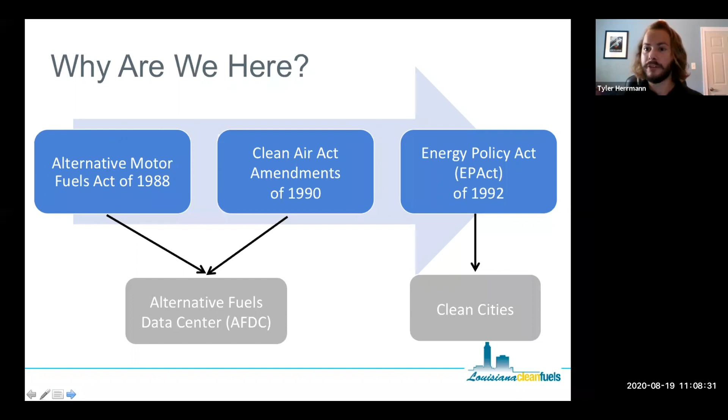We have two major goals: reducing emissions from on-road vehicles, as well as reducing petroleum imports. We do that by promoting and providing technical assistance on alternative fuel vehicles. There are around 100 coalitions across the country, each led by a coordinator, such as Ann or myself, with kind of separate territories. We all get to deal with things specific to our region, because every state and every region has different needs and different technologies that work for them.

So that allows for a very individualized approach for the given territory. But there's a lot of crossover between us, so we all work together very well, and that gives us a wonderful national network of coalitions that can feed on each other's expertise and knowledge, while still being narrowly specified to our region. You can go to the next slide, Ann.

So the priorities of Clean Cities coalitions under the Department of Energy are national security, so that's being fuel independent and energy independent. Affordability for business and customers: a lot of the alternative fuels end up being cheaper for customers, and a lot of the technology improvements we work on make it cheaper for individuals and fleets to operate their vehicles. Economic growth kind of comes with the territory, since alternative fuels are domestic fuels, and that helps everybody whenever we invest in them.

And then reliability and resiliency. A lot of that just comes from doing it and getting case studies and learning more about the fuels and what they can and can't do. All that can feed into making a more reliable and more resilient network of fuels. Having more fuels than just relying on a single one or two also allows us to have redundancy. So you can go to the next slide, please.

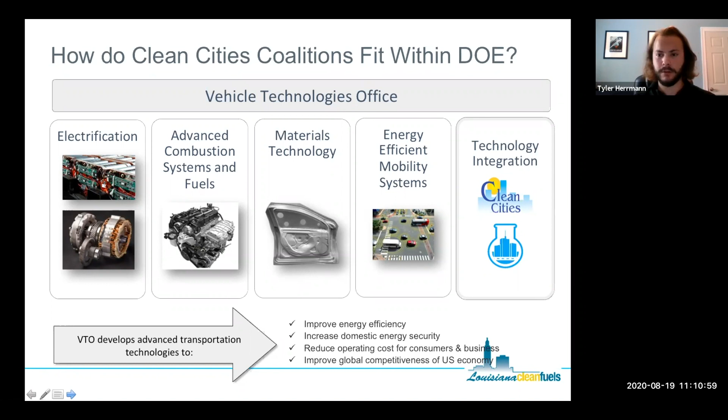So how do we fit within the DOE? The Department of Energy has under it the Vehicle Technologies Office, which has 5 different segments: electrification, advanced combustion and systems and fuels, materials technology, energy efficient mobility systems, and technology integration. Clean Cities fits under technology integration. So we're a DOE program focused on technology integration, actually getting these vehicles on the road and into consumers' hands.

We deal with everything: light, medium, heavy duty vehicles across the market. Energy efficient mobility systems technologies focuses on how these things fit together in one network to make an actually good, robust marketplace and technology suite we can all benefit from. And we work with all the alternative fuels as well, not just natural gas or electric. We work on all 6 that you see laid out there.

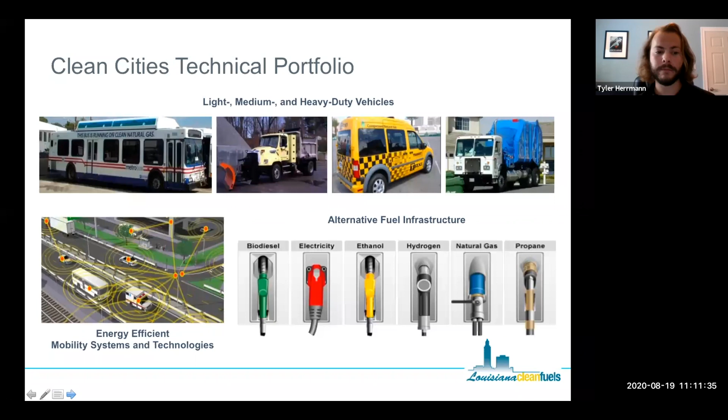I always like to focus on this one a bit. We don't specifically deal with greenhouse gas emissions all the time, but it's important to look at. Back in 2017, transportation overtook electricity generation as the largest greenhouse gas source in the country. That's a huge deal, because since the dawn of electricity generation, that's been the biggest greenhouse gas emitter. Transportation has been steadily increasing, partly from increased transportation but also because electricity generation is becoming more efficient. This gives Clean Cities a good vantage point, since we're experts on transportation, so the ball is in our court now. In 2018 alone, Clean Cities reduced petroleum usage in America by 1.1 billion gallons, which is a huge number with associated greenhouse gas benefits as well.

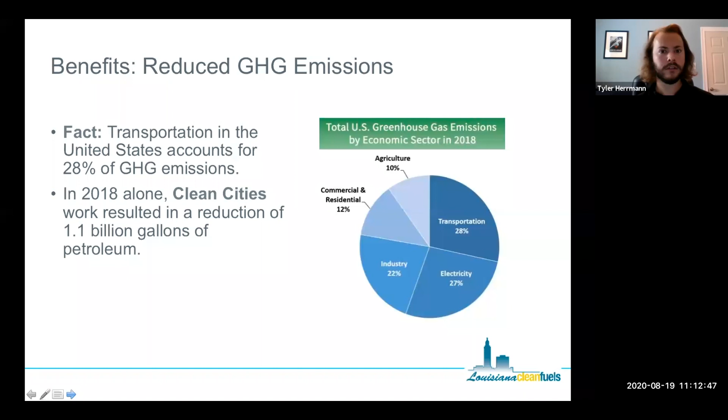A couple of our programs: we have a green fleet certification, launched a couple of years ago, to recognize fleets doing particularly well with reducing emissions and focusing on alternative fuels, which is awesome. We also give feedback to fleets, telling them, for example, this particular VIN number truck could be replaced by this sort of vehicle, or suggesting ways to shift things around. So we give actual direct feedback, which is lovely.

Outreach and education is the bread and butter of Clean Cities. We host webinars, workshops, conferences, and try to get information out there, because information isn't valuable unless people actually have it. First responder training and funding assistance are other things we work on - helping facilitate grants or making good grant applications, and training first responders so they understand how to deal with alternative fuels if there's a fire or other problem with a vehicle.

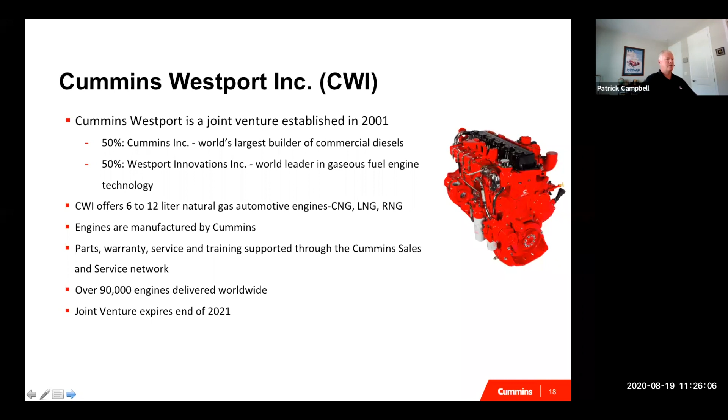So this is the product lineup. Like I said, we do 6 liter to 12 liters. So we have a B6.7N, an L9N, and an ISX12N. For those who have been around a while and have known our products, we've made some nomenclature changes a couple years ago. We used to have the G as the suffix at the end of the name. We've gotten rid of that because we have a corporate branding culture, and the N designates natural gas, and the G could in the future designate gasoline. So we decided to make that change.

Product range from B6.7N, 200 to 240 horsepower, all the way up to the 12 liter, 320 to 400 horsepower. You can see the torque ranges, etc. These are all near zero engines. There's a typo in the B6.7N as a 0.1 - these are all 0.02 gram engines. The EPA certification level is 0.2, so we're about 90% cleaner than our diesel counterparts. That's a big deal, especially in California or anywhere there are sustainability goals and alternate fuel type funding and so forth.

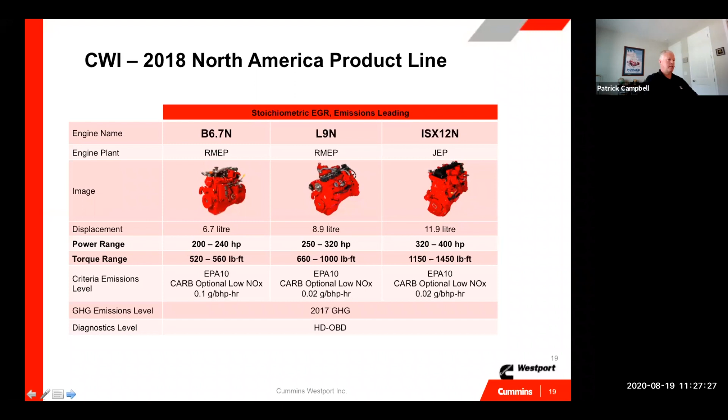Some of the applications we work in: on the top row from left to right, that's a Freightliner tractor, a transit bus next to it, a low cab forward garbage truck, and of course a school bus. On the next row, we have some of our major customers. UPS has about 5,000 Cummins Westport products. Waste Management has in the neighborhood of 12,000 and growing. Both of those fleets are still continuing to buy CWI.

Then we have a bulk hauler - we do pretty well with bulk haulers. And then you have a turnpike double from FedEx. Lots of applications - basically anything that goes from point to point and has an opportunity to refill overnight is right in our wheelhouse.

Finally in the bottom row, you have a terminal tractor or a yard jockey. We do pretty well there, as well as that concrete mixer. The point to make about that is we have fleets that are awarded government contracts for road building, etc., that are able to use a sustainability provision to get contracts. There's a big fleet in Chicago, Ozinga, and CEMEX is looking at some concrete mixers for California. So it's a growing part of our business.

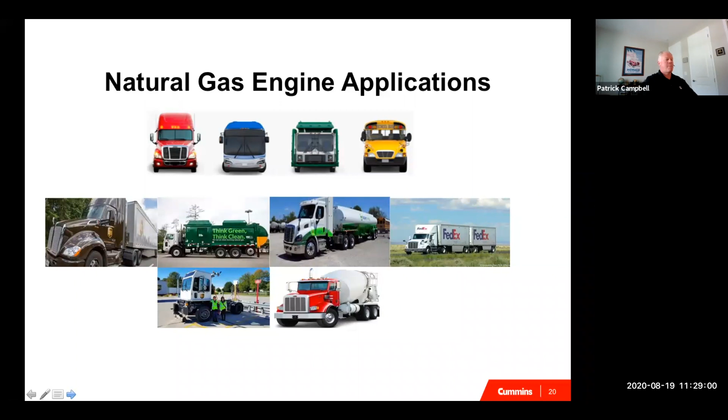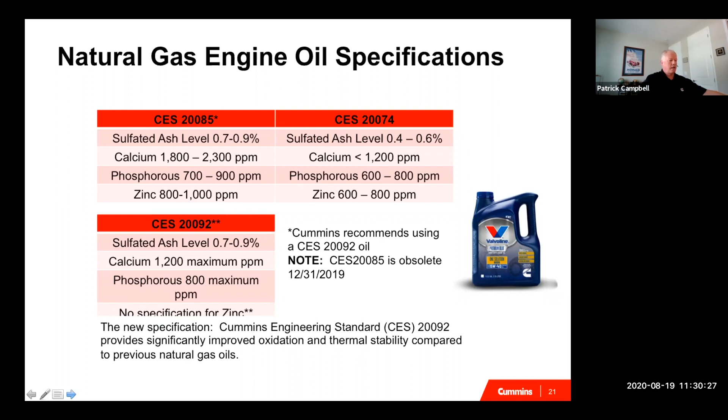Oil level checks probably seem very self-explanatory, but you wouldn't believe how many times we have to do an investigation on why units seem to be using oil. A lot of times it's based on drivers putting too much oil in. They'll pull in, fuel up, and check the oil right away, and it doesn't give enough time for the oil to drain back into the oil pan. We recommend a minimum of 15 minutes, but you're better off waiting 20 to 30 minutes to check the oil. Make sure the dipstick's inserted the whole way.

We can't emphasize this enough: never fill or add oil if it's anywhere between the full and add mark. Only add oil if it's below that, in the add section. We've had a lot of oil consumption issues where the engine will burn the oil off, and fleets become quite upset because they think we have an oil consumption issue. In reality, it's just that they're adding too much oil to the engine.

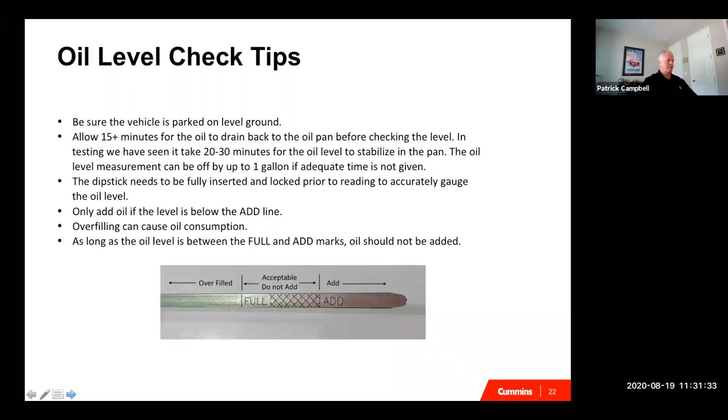So, oil consumption. One of the big reasons we have it is obviously overfilling your crankcase. But another reason is because oil drain intervals sometimes are missed. I'll get into the specifics, but it's a big deal for us because these engines are very sensitive to oil drain intervals.

We went to 1,000 hours or 50,000 miles, for instance, on the 12 liter. But you have to think about the average speed of the engine or the truck. If you're an over-the-road truck averaging 50 miles an hour, times 1,000, you're at 50,000. However, if your average speed is 18 miles an hour, like for a refuse truck or a bus, then your drain interval is around 18,000. So there's quite a bit of difference. If you go over, these engines are very susceptible to issues with precious metals inside the engine wearing out prematurely, oil leaks, etc. So we just wanted to reiterate, make sure you're changing your oil on time.

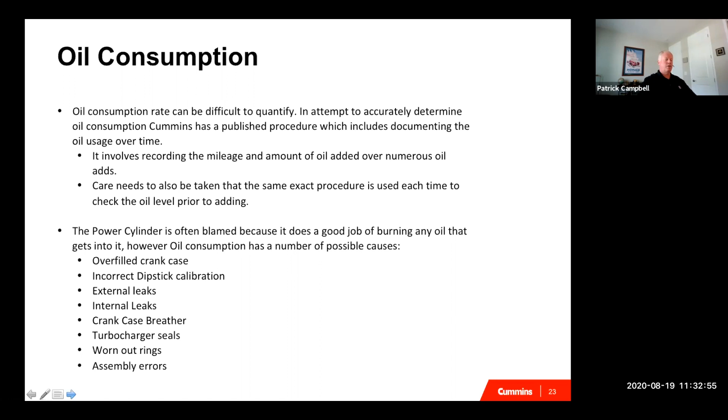It's a conversation that we have with fleets all the time, so I just wanted to make sure that was very clear.

This is a quick chart of the different components of the engine on the left-hand side, and then the hours and part numbers for the maintenance. You can see spark plugs for the B6.7 are 750 hours, 1,500 for the L9, and 1,000 hours for the 12 liter. People ask why it's less for the 6.7 — the quick reason is the engine runs at a faster RPM, so it gets more sparks, so it needs to be replaced more frequently.

Anyway, that's there, and I'm sure this will be in the follow-up material. If anybody has any questions and wants to reach out to me, we can discuss that offline about their maintenance and so forth.

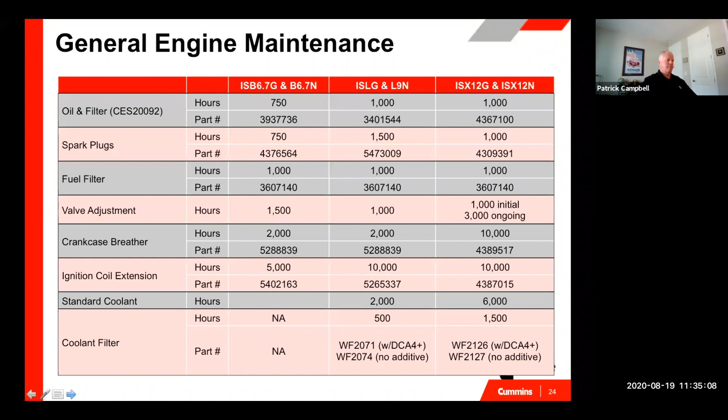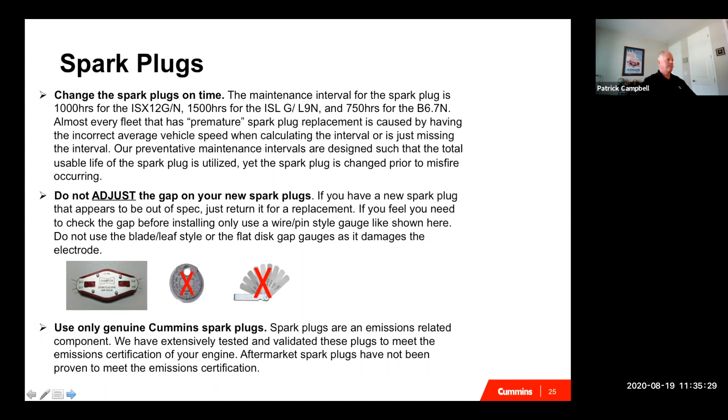I think that's it on that. Next slide. Oh, that's just a copy. So the spark plug—another thing about maintenance, please do your maintenance based on hours. I reiterate, the way to calculate it: if you have INSITE software, which is the Cummins diagnostic program that you plug into the engine to get all your fault codes or fuel economy numbers, it'll tell you your average vehicle speed, and that should be a way to back into the number on your maintenance intervals. Spark plug and oil changes should be performed on time, not waiting until you're having fault codes, because you'll have unplanned downtime.

Idle time is very negative. That's why we recommend hours versus miles. These engines really don't like to idle much, and it degrades the oil even quicker. So we recommend keeping idle time to a minimum.

Genuine Cummins parts—we recommend always going with the genuine channel. The CES 20092, the 20085 is probably not even available in the marketplace anymore, but we just want to make sure you're using the right oil.

Finally, every other maintenance interval, you should probably make sure you have the latest ECM calibration. Cummins is always making updates and changes, and that information is available online with the INSITE software. So make sure you have the latest and greatest, and if you can, download it to the ECM about every other maintenance interval.

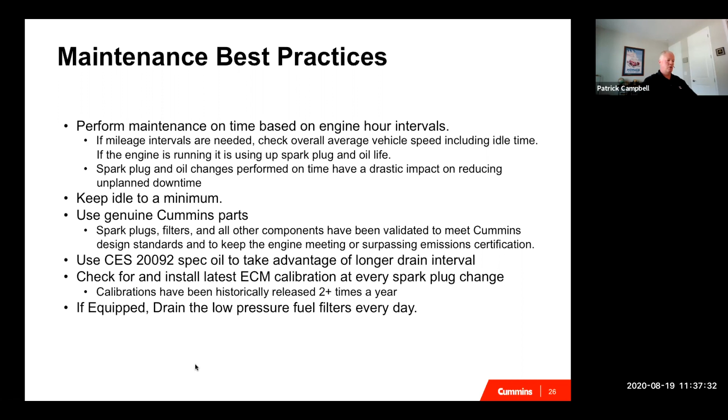And then finally, on fuel filters, if you can, we recommend draining them. And if there's an issue with the compressor station where you're getting your fuel, it's something to keep an eye on. But we recommend checking the level of your fuel filters every day if you can. That might be it. Oh, nope.

Okay, here's finally some things to keep an eye out for—it's basically a tell that you're not quite getting the job done with maintenance. Misfires on spark plugs: if one starts to misfire, it's probably time to change all 6. It can cause rough running, fault codes, low power. It can even cause degradation of the catalyst downstream, which is a big ticket item. So we recommend changing those on time.

Changing your oil on time—you could have issues with front and rear main seals coking up or leaking. We've come to the conclusion that we really don't have an oil seal issue; we have people not changing their oil on time, which causes this failure to happen prematurely. Also pistons overheating, especially on the 12 liter. Sometimes we have coking, which causes pistons to overheat, and we have premature failures. So for any of these issues, please revisit what your maintenance is.

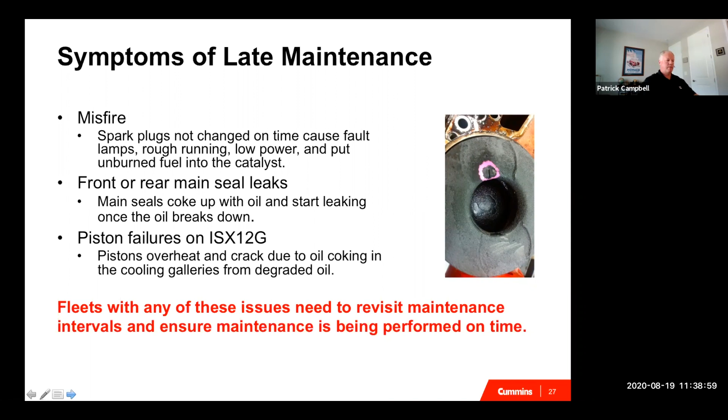Like I said in the beginning of the presentation, we have probably 200 account executives in the field. So if your local person isn't calling on you, or you have questions locally, connect with me, and we'll make sure you get the right person on a local level to come in and review your maintenance practices, and hopefully we can get everything squared away. So I think that's it. Oh, this is just sort of an appendix of the different hour meters, but it's the same as before. So I think we're good.

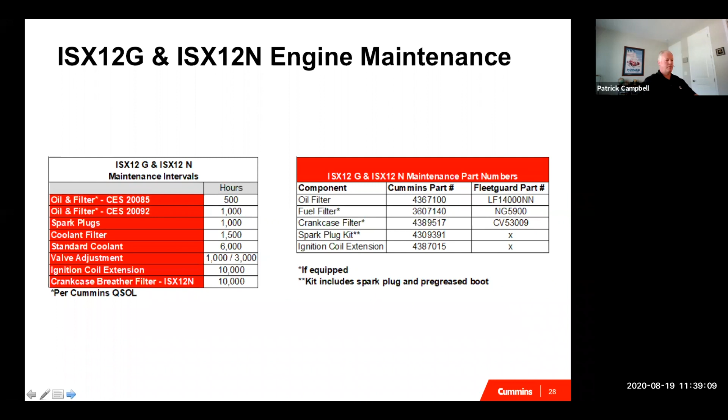So I want to give a little bit of background about Republic Services and their work with LCF. Then I'll introduce Dwayne, and we'll get into the Q&A after that. So Republic's been working with LCF for a very long time. They've been operating CNG vehicles for ages and have tons of experience with it. And we've had a really good partnership with them so far, and it's been lovely.

So they've been a direct member, a dues paying member, since 2016. They were in our beta test of the Green Fleets program when we were first starting to get that off the ground, and maybe not surprisingly, they became a 5-star fleet under that. One of the general managers at Republic Services, Calvin Ray, has been a board member for longer than I've been around, and he provides some fantastic information for us. It's just a really strong partnership.

And then in 2019, they were recognized as an LCF Clean Fuel Champion because their work in our territory alone was responsible for mitigating 19,000 tons of greenhouse gases in 2018, per the previous year's annual report. And that's because they're using CNG vehicles, and they have very aggressive route optimization programs and idle reduction, and that really adds up.